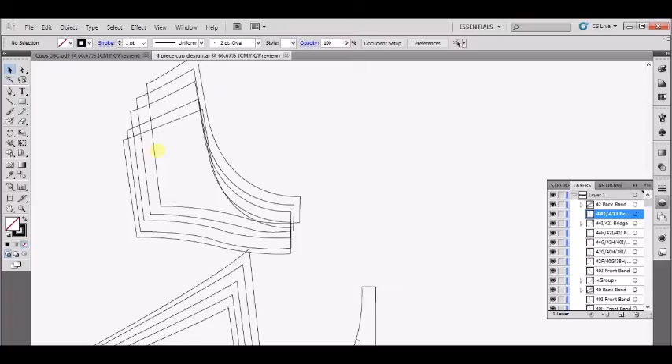So what I'm going to do is copy these. I'm going to hold down the shift button and select each of those, copy them, and bring them over here. So now if you look here at the name...

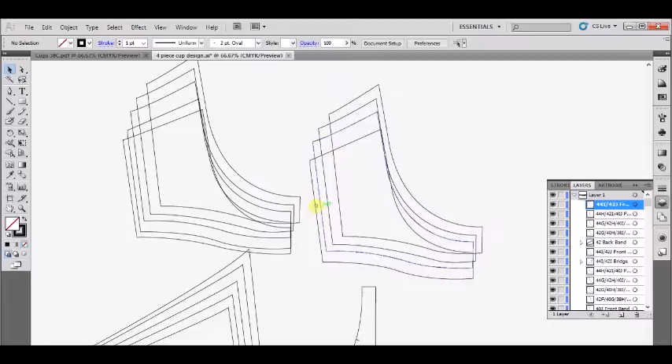This one would have been a 42G, 40H, but this is also, actually I forgot, it was also the 44F. So basically this band we have repeated for each size set. Now I had to make a few tiny modifications when I compare them to the back band, but that's probably only because I changed the shape of my back band. There's a good chance that when you convert this in, you can line them up to double check, but you may not need to. So we basically have 44F, G, H, I.

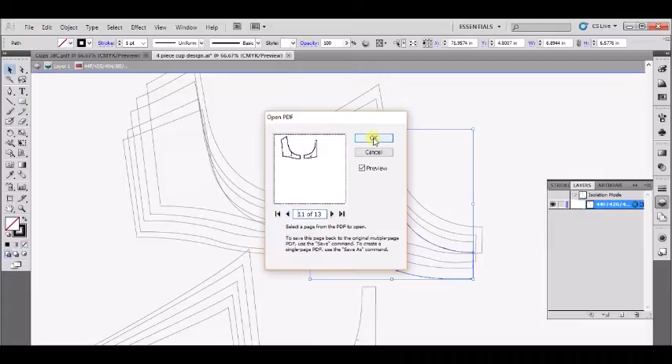So now we need the 44J. I'm going to go open up my recent file. Let me figure out which one this is — that's the 32, 34, 36, 38, 40, 42, 44. So this is the one right here, all the way up there. Sorry, just need to make it smaller.

Okay, I've drawn in all my lines for the front and bridge for this size. Now, when you're doing each size, it's really important that you don't hit save in your main file, because you're going to end up having to export it again — if you save over it, you lose all your other pages.

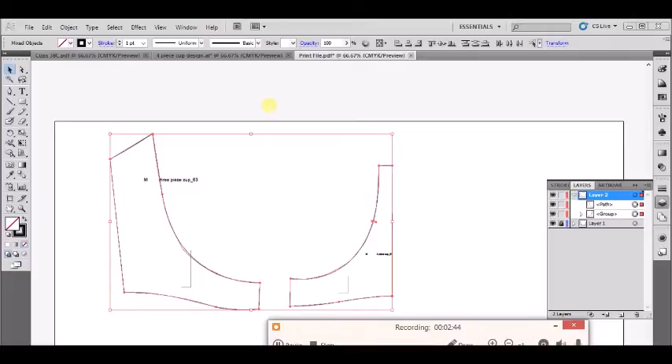So once I've drawn it, I'm going to just hit Control X — excuse me, Control X, where is it — and then bring it over here. Oh my goodness. Okay, this is my last size. Over here, I'm going to close that — no, I'm not saving it.

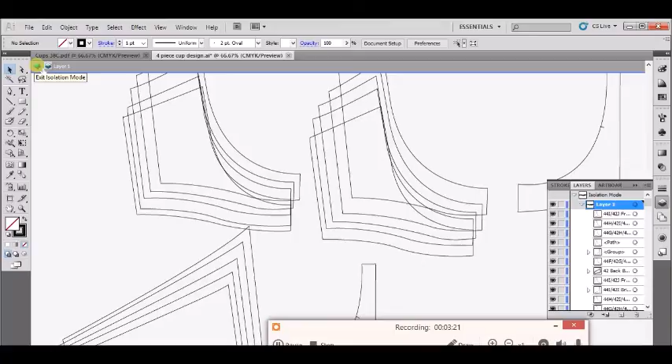Then we're coming to here. And I don't need to be in isolation mode — I don't know why I'm in isolation mode. Alright, now this one here, we need to name this one. This is going to be the 44J bridge. Now if we were doing additional sizes, we could name all the others 44J front band. So now the last thing we really have to do for the band is we need to import and convert all of our back bands.

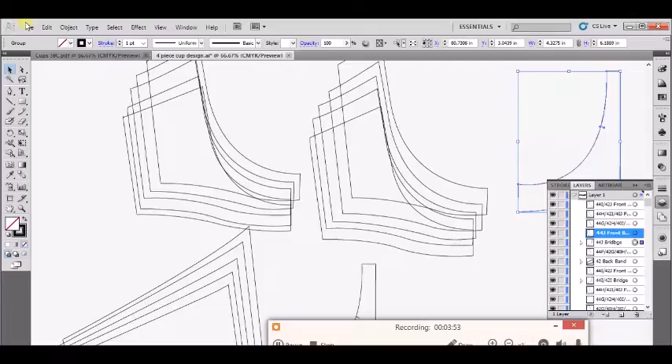So I'm going to go do my 44, and then just open each of these just like we did before. I'm going to make my screen a little smaller, and I'm just going to go in and redraw these. Remember, I'm actually making it without this dip here — that's why I'm having to alter the patterns when I'm done.

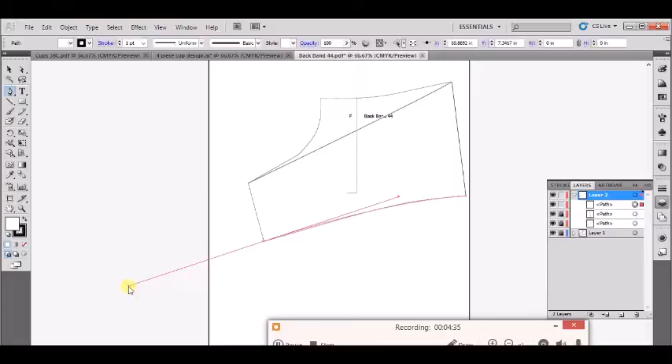So I'm just going to go here, click. Almost done with this one. Okay, unlock those, Control J, basically join them all together, Control X to take it off that page. I'm not going to save that because if we save it, we lose all of our other band pieces.

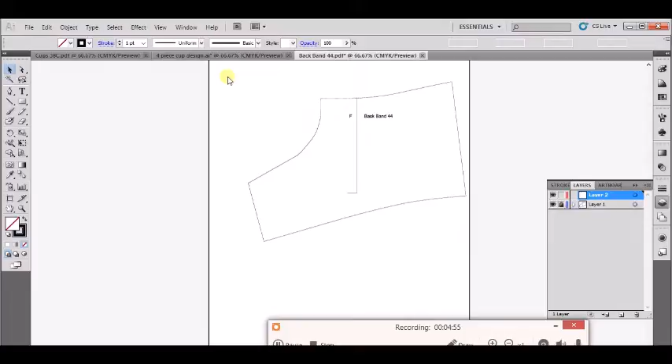And then I'm going to bring it over here. Now, my screen, because these pattern pieces are a lot bigger, I have to move this over just a bit more — since I've already done all the other sizes. Move those over here because that's what I'm working on. Okay, so this is my 44F, and I keep doing that. So this is my 44F.

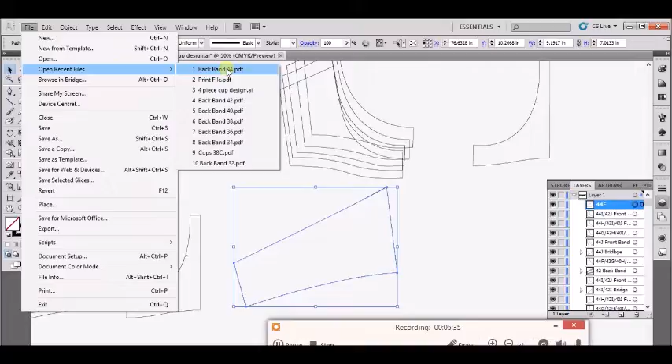And then I'm just going to go to my recent files, so I can open that one back up, page 2. I'm going to do that for my last remaining set of sizes, and then I'll show you what to do.

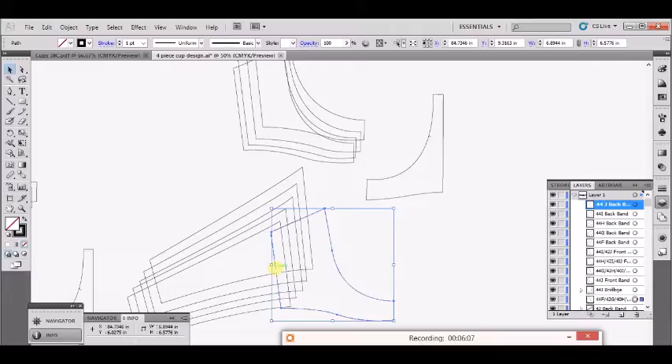Now that my whole back one has been converted, I'm just going to compare my front and back, and I'm overlapping it at about a half inch. I know this because I've done this enough times to know about what a half inch is. Nope, that's too much than a half inch. Basically, because our seam allowance is a quarter inch on each one, we don't worry about what the edge lines are.

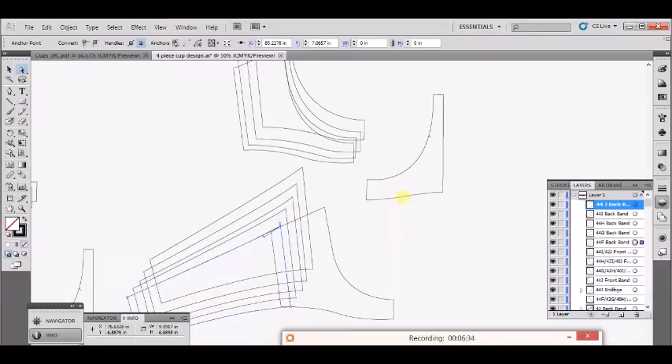What we want to know is where they overlap. So right here in the middle is where they overlap, so we want to make a smooth transition from the front to the back. I'm just going to arrow those down so we have a nice smooth shape. Now in the smaller sizes that I did, I actually had to change the front more than the back, but here this looks like a smooth transition when you're going to be sewing it together. So I'm going to check that for each one. I've got that, and I've nested them — did a temporary nest so I know where things are going.

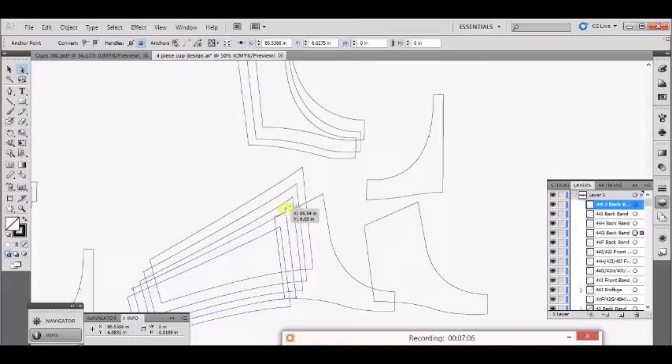Here I'm just arrowing down, so right at the middle where the intersection is, that's where that needs to be. And there's just extra points here.

I'm going to do that for each of these sizes. Once we do this, we're just going to work on the cups - I haven't completed those yet, just the bands. Then we're going to work on a nest that looks nice, and then we can do our colored lines on. That'll be the next thing we do.

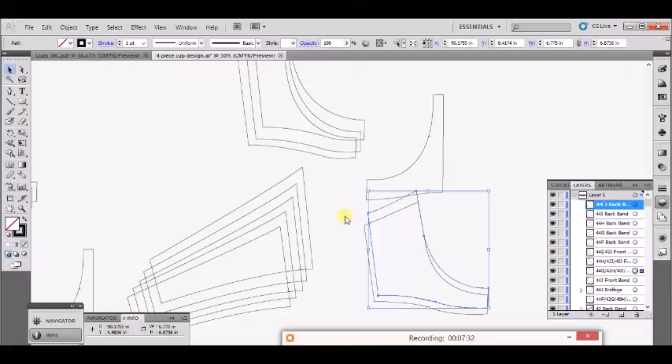For each one of these, I want to try and get them close enough together, but the lines aren't overlapping. This way when we print them out and cut them out, it's going to be easy enough.

I can also use my arrows, because like I said, we want it all to fit on one page. Okay, so this looks pretty good. This one over here does not.

So let's play around with this. Okay, I probably need to have a little overlap on all sides. Okay, so they're still overlapping a little bit here. I wasn't really being careful on that.

So this one, actually, these are pretty close. But I would like to have a little differentiation - I'd like the lines to not all be connected. Because what's really frustrating is when you have somebody making the pattern who can't figure out where the lines are to cut them out.

Okay, so now let's figure out what we want to do for our lines. We can do this so all of our F's - the F of everything - let's do this dashed at 8. Let's see what that looks like. So that looks pretty good.

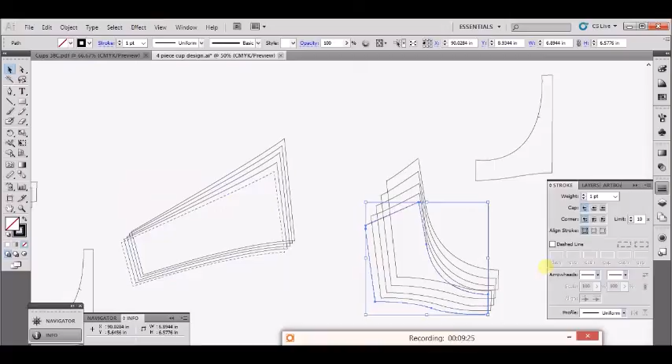Once you have the one highlighted, if you just go and select the other one and then hit the dashed line, it will copy what you just did. So here, if I want to hit dash line, it's going to copy the last one I had selected.

So here, let's just say we'll do 3-5-2-6, just to see what it looks like. Yeah, that's definitely something we can differentiate.

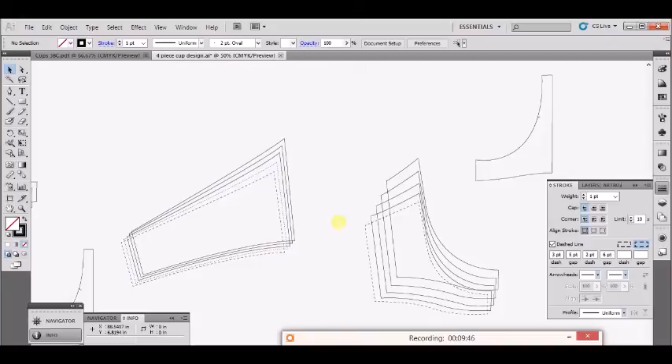So we touch that one, and then we're going to select this one, and then we hit the dash line. We don't have to remember what we just selected. So here, let's do one that's...

Okay, so I created - I'm doing the next one, a dashed line, and then we'll come over here and I'll create a new one. Let's just say we do 10. See if that looks different than that first one.

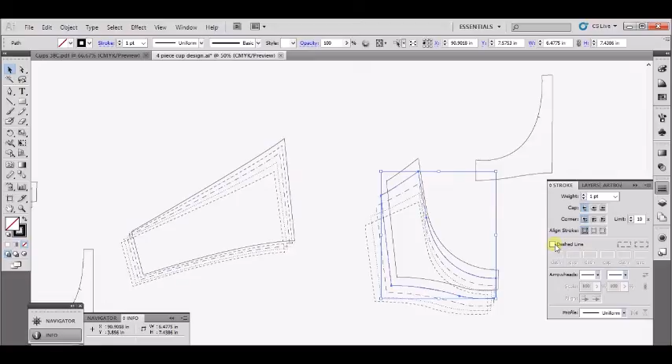Yeah, it looks pretty good. So that one. This one, maybe we'll just do this as 2. That should look very different than anything else. That's your 2. So once you have that, then we can go over here and say, okay, you know what...

This one and that one - oops, yeah, I have those grouped. Undo the group.

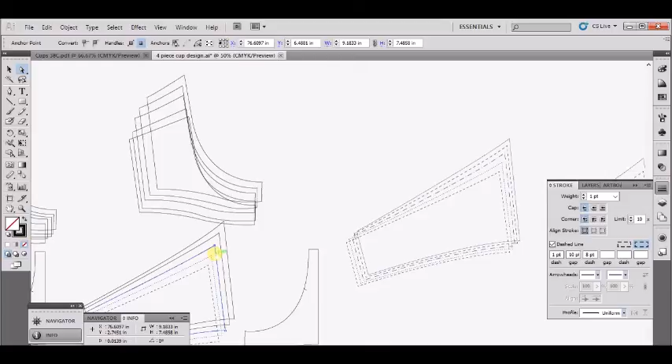So I select that one, I'll select this one, do my dashed line. Select the second one, select the second one, dashed line. So it's really easy to repeat the same pattern on each size.

So you can see, I'm just going to do that for each of my sizes. And once I'm done with this, I'm going to go work on my cups, making them pretty in Illustrator, and working on doing my nest.

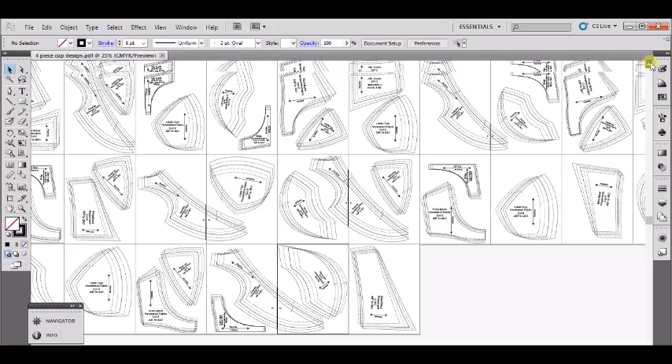Finished results: I have about 32 pages. I actually created these as art boards, and since the normal print size is 8.5 by 11 in the US, I made my art boards 8 by 10.5. That way you gave a little bit of area around the edge, because some printers don't print all the way. Anyways, as you can see, this was very time consuming.

If I were to give a good estimate of how long this took once I put it into Illustrator, I'd probably say close to 8 hours, maybe a little less. I have a 4-year-old, so I had a lot of distractions. I might have been able to complete it in about 6 hours, but this one took me about 8 hours.

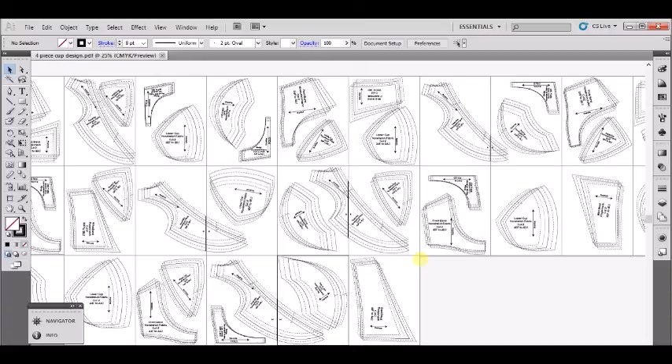If you're doing this for the first time, I'd probably give twice as much time, so you're probably looking at around 16 hours of work to complete your first full pattern like this. A lot of other patterns you can create with the software are not this complex with this many ranges, but bras are a whole different story. But that is the end of my Illustrator importing and pattern creation tutorial.